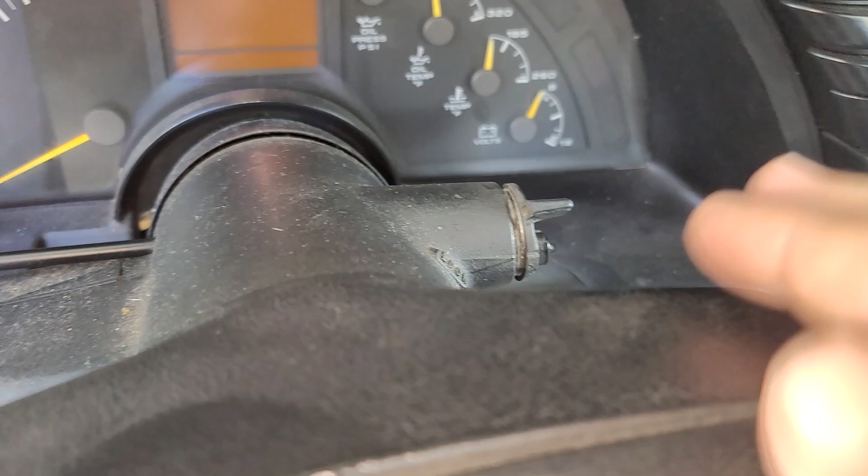Now on the C4 Corvettes, you've got a push button basically here, which most people don't even notice. There's a little button right here, and to get that thing out, you've got to push in to pull it back to the off position.

I'm not sure how that's supposed to make you remember to put the car in gear, but like in this case, this Aqua LT4 car here that we've done quite a few videos on, this car does not have a working brake handle at the moment. The brake assembly, I think, actually needs adjustment underneath, which we'll delve into in another video. But anyway, before I get sidetracked, the parking brake handle was always here.

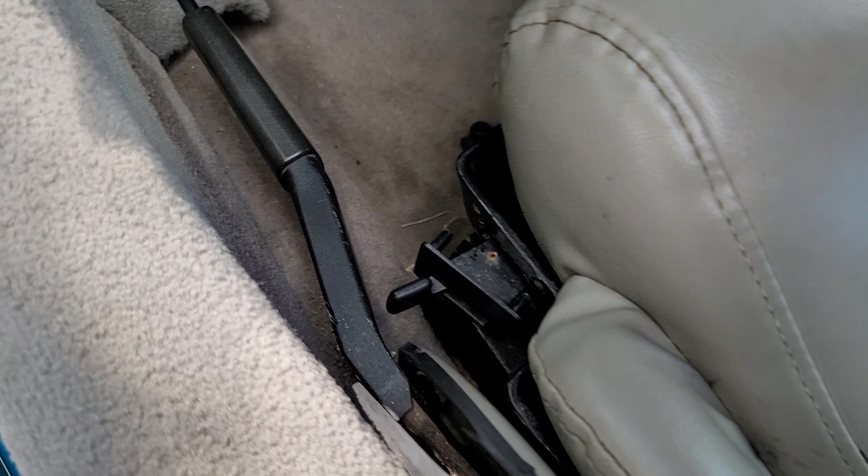Now, when the C4s came out, they moved the parking brake handle over here in the corner beside the seat, which is really bizarre, because a lot of people were confused - we were used to a handle being in the upmost up position when activated. So how are you supposed to get in and out of the car when you activated it, right? We made jokes about busting your nuts climbing over the center console because the parking brake assembly was in the way.

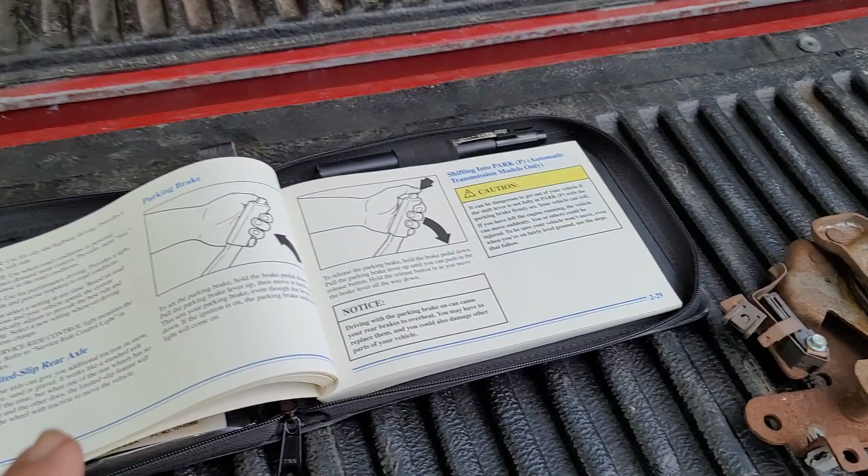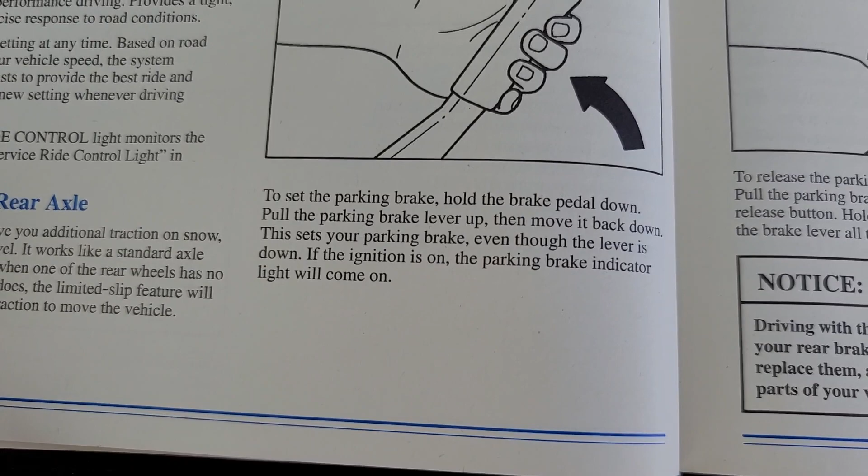So let's go to the owner's manual - this is what I always like to do, just to explain this. And then, of course, I've got one that's actually removed here. It's got basically half a page, a few sentences, that just tell you to set the parking brake: hold the brake pedal down, pull the parking brake lever up, then move it back down. This sets your parking brake even though the lever is down.

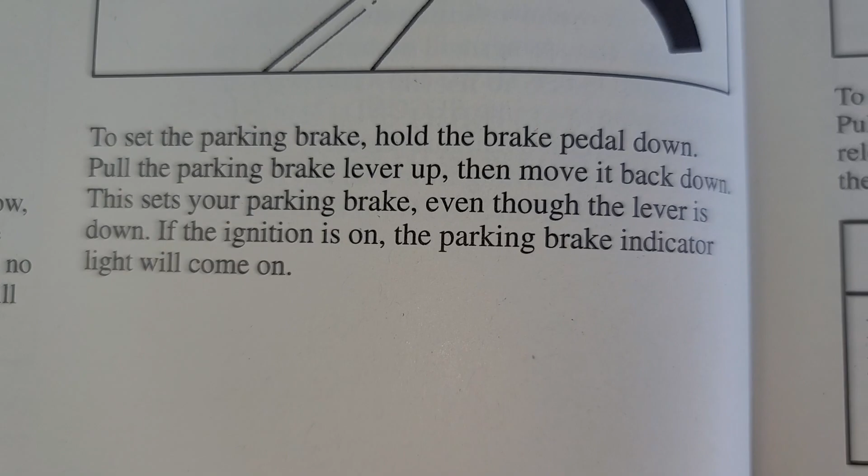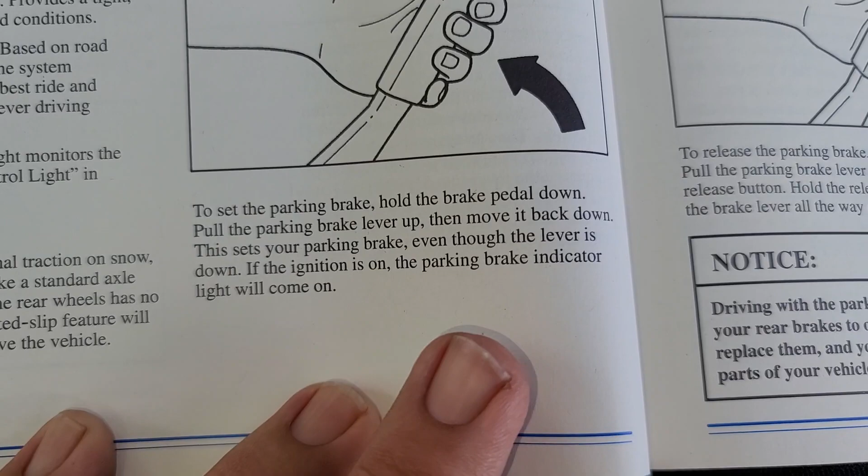That one sentence right there is what people miss and what confuses everybody, because the engineers did a good basic job of describing this, but we were so used to growing up as kids with a parking brake lever being up, it was hard to understand. Of course, if the ignition's on, the parking brake indicator light comes on.

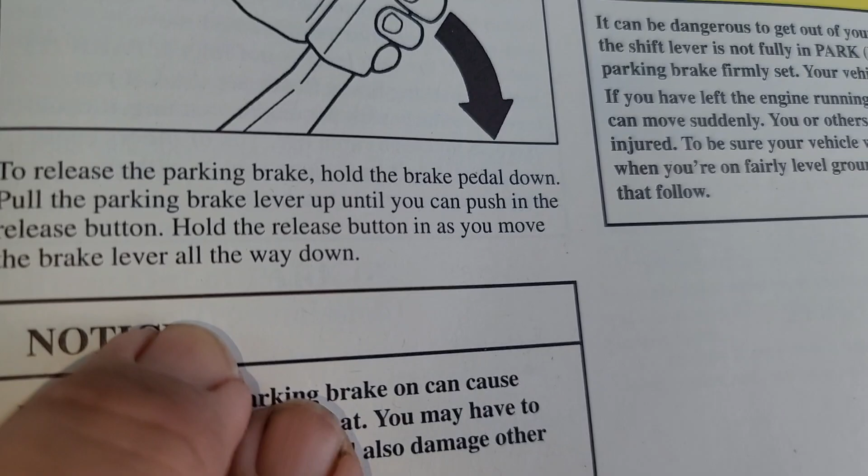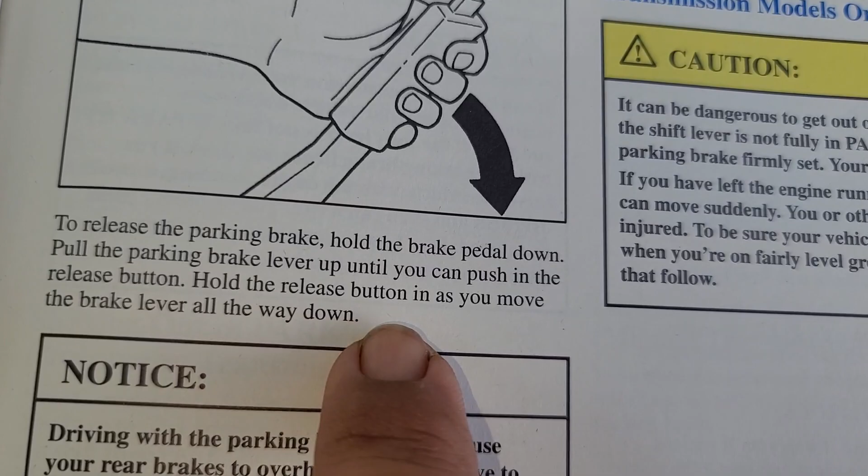To release the parking brake - this is where people really got in the weeds, and this is where they get broken - hold the brake pedal down, pull the park brake lever up until you can push in the release button, then hold the release button in as you move the brake lever all the way down. That's it. That's all they tell you about how to do this.

Now, let's look at one that's actually been removed from the car so you can kind of see what's going on here.

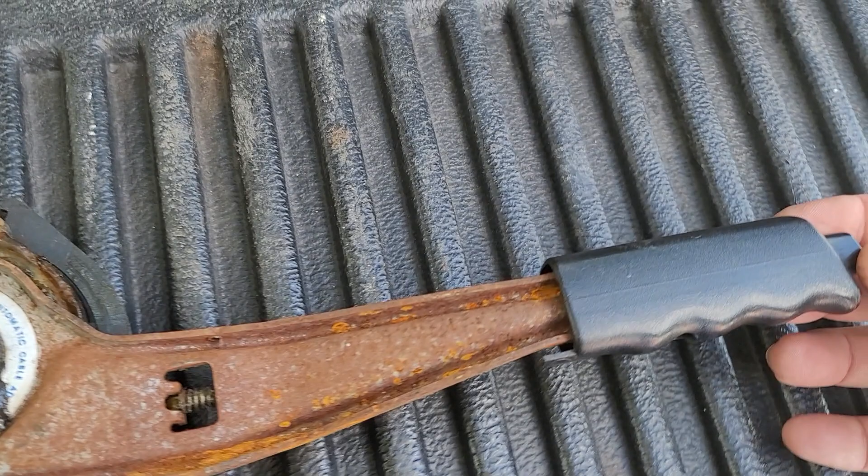Now, of course, this is the way it looks here. These are obviously your ergonomic imprints or indentions in the handle to put your hands on, and there's your button right there.

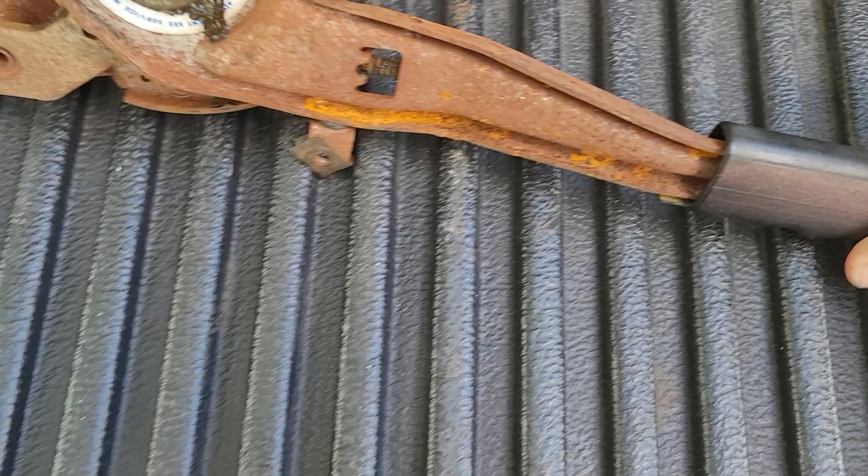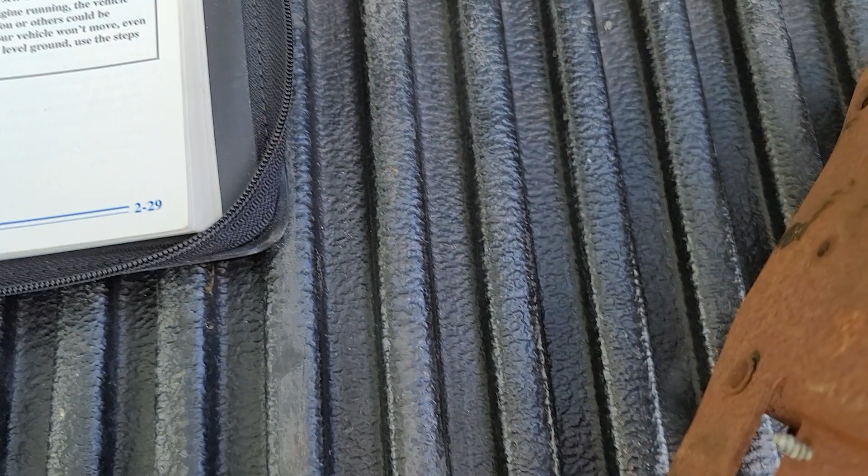But what this does, it comes back into kind of a unique process into this bell crank here, where it pulls up and down. I'm gonna see if I can do this one-handed.

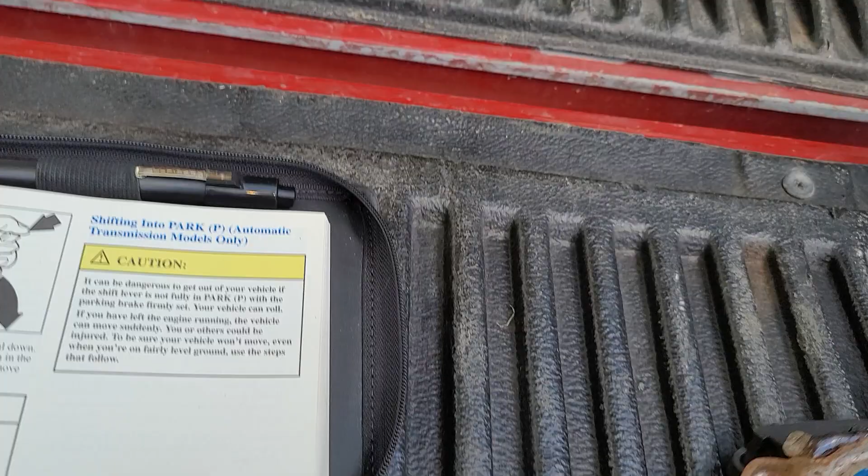So if you look there, you see that piece there. When you pull up on it, what it does is, I may do this a different way. Let's see if I can do this a different way so you guys can see, because I did not bring my proper equipment out here. So as you pull up on this right here and go back, it moves that back, and you can see from here what it's doing. It's pushing

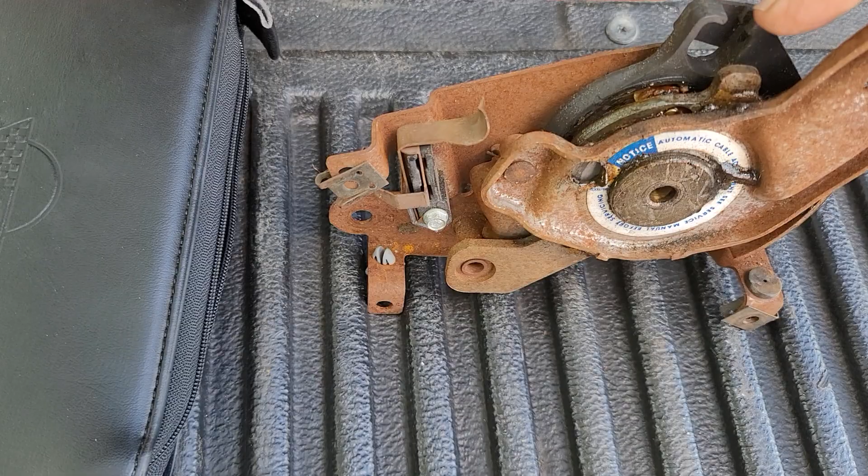That whole assembly back, and this is where your cable ties in right here. Your cable ties in right there and wraps around that loop there and goes back, and this is where it comes back and goes through the body of the car back there, okay?

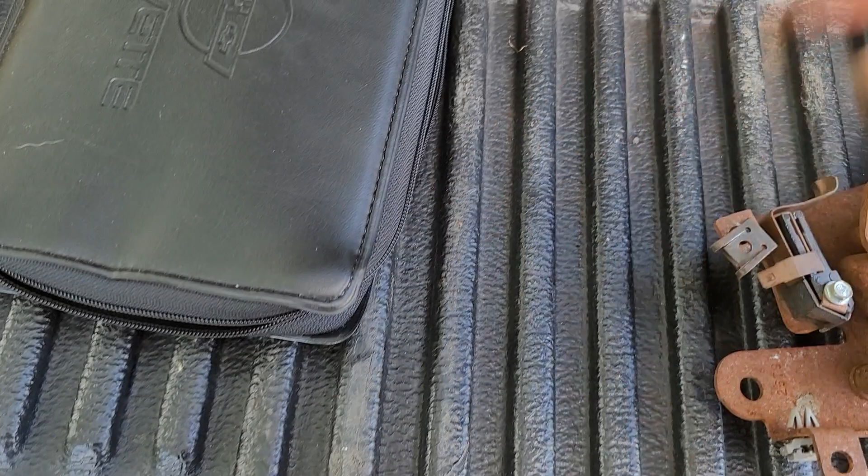So now we actually have the parking brake assembly in the locked position, and you're gonna leave it right there. That's the stowed position for the handle, so that's how you get in and out of the car.

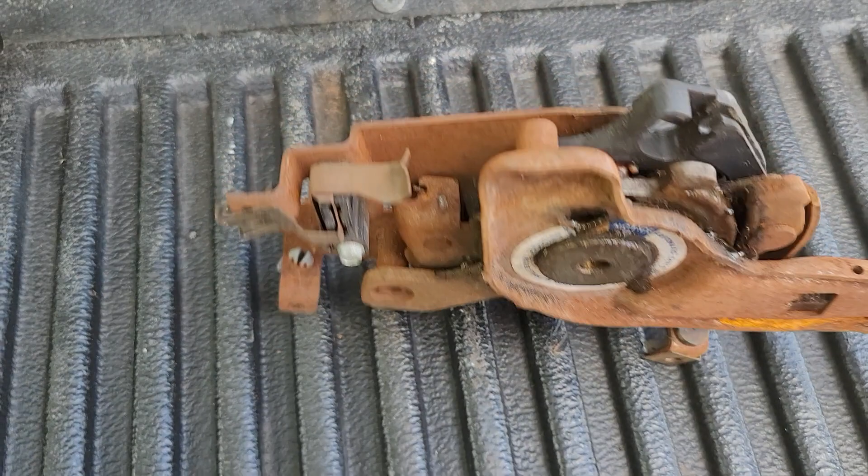Now, you see here this rod right here, right? This is the rod that actually pushes down. Now you remember that part in the instructions where it said push in the handle until it can actually go down, or push in. So you see there, it really won't go in, right?

But if I keep pulling, see how it activates that piece right there? See that spring-loaded piece? And then it draws it. If I can get it the right way. Right back down again. And that's basically it. That's how it works. And then of course, once it brings it back down, that spring-loaded rod comes back out of there.

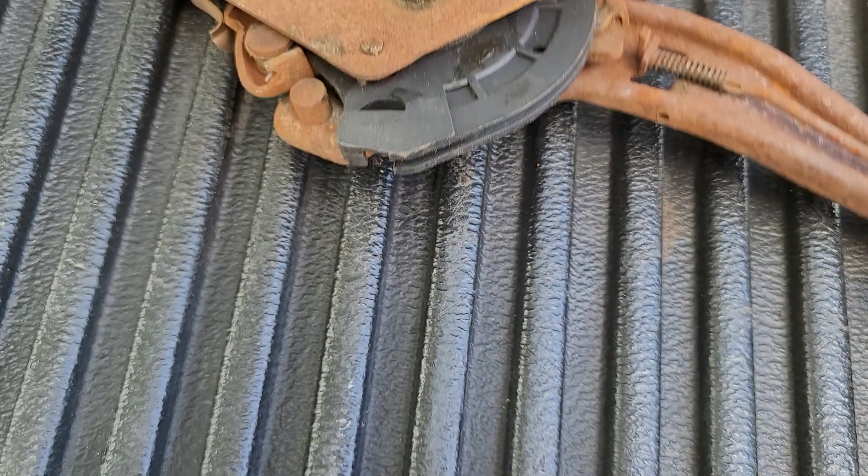What happens where the confusion starts is people try, and you can actually see the teeth right there. See them in that corner? That's where those activate right there. See that pawl right there? What you're doing is you're releasing that pawl. So what happens is people get, and they forget where they're supposed to pull this up at, and they start jamming this in, and it gets stuck.

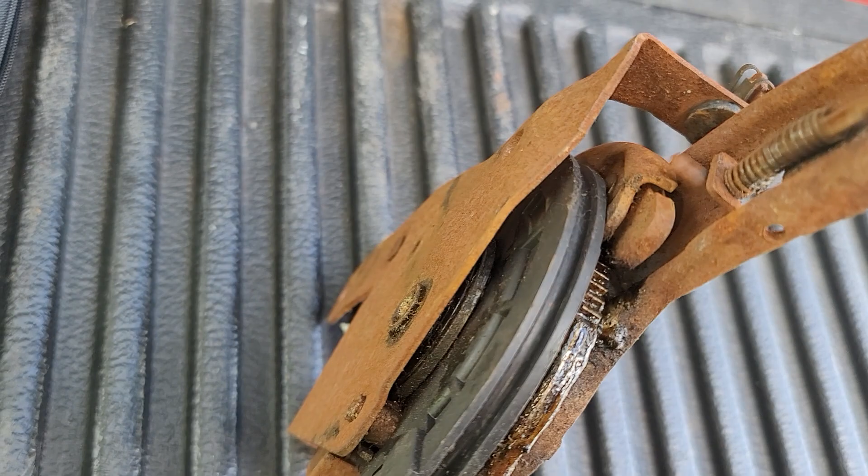And then with time, that edge breaks off or gets worn, and then the parking brakes won't work anymore. Or the grease dries up inside of here.

This really has just this old Cosmoline type grease. And for those that don't know, Cosmoline is way back in, I think they started that in the 20s or 30s. They would coat military, it was a military application. They would coat stuff in Cosmoline grease to keep it protected. And that's basically what this stuff has on, a heavy duty grease, and the grease will dry up with age, and then it won't activate like it's supposed to.

So it's really kind of a unique design. There you can actually see, there are those three teeth, the teeth right there. There's that inner bell crank that spins, and then of course your main handle. And then of course it's just bolted to the body of the car right here, and right underneath here. So that's basically it, right?

So coming out here to show you correct operation, right? So you'll pull up, it's activated, right? Push it back down, pull up again, get just a little bit of tension on it, push the button in, hold the button in while you're coming down, and pull it back down. That's it. That's the whole thing, guys.

There's really not much more to it. So, you know, that way you don't have to try to climb over the parking brake handle every time you get in and out of the car.